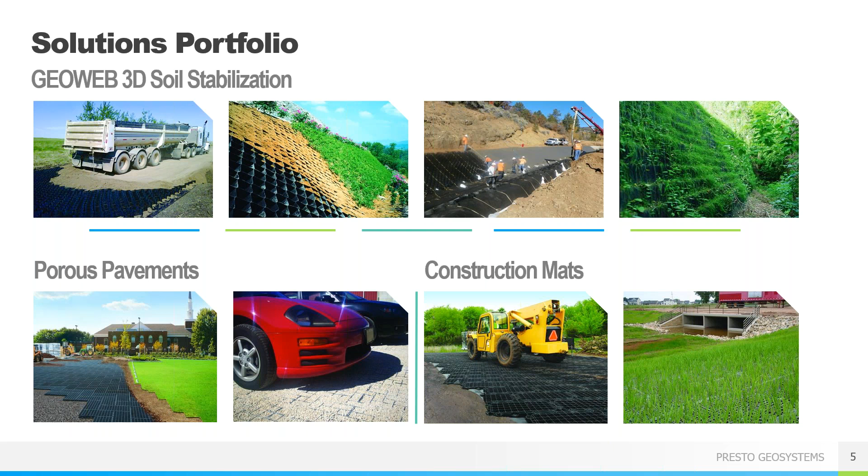As I mentioned, we worked with the Army Corps of Engineers to develop the GeoCell system. The initial iteration used wax paper in order to be water resistant, but that wasn't strong enough. So they made some out of aluminum, which had the strength, but was difficult to ship and install. Finally, a high-density polyethylene, or HDPE, was the chosen material due to its lightweight, flexible nature and the fact that it is inert to nearly all chemicals and climate conditions.

We'll now get into a little general information about our GeoWeb geocells. The GeoWeb system is our version of geocell technology and consists of 2 main attributes. The first is the cell or container size. The cells come in 3 diameters, small, medium, and large openings, with cell heights of 3, 4, 6, 8, and 12 inches available for each diameter. The proper combination of cell size and cell depth depends on the project details.

And with that project evaluation, we can help you determine which one is the most appropriate for your specific application. There are also 5 different section lengths to best fit your needs.

The ultrasonically welded seam, where all of the connecting points are, is very important to the function of a geocell. The stronger the seam strength, the better the performance of the geocell will be. A strong seam allows for heavier infill material, steeper and taller slopes, and better lifetime performance.

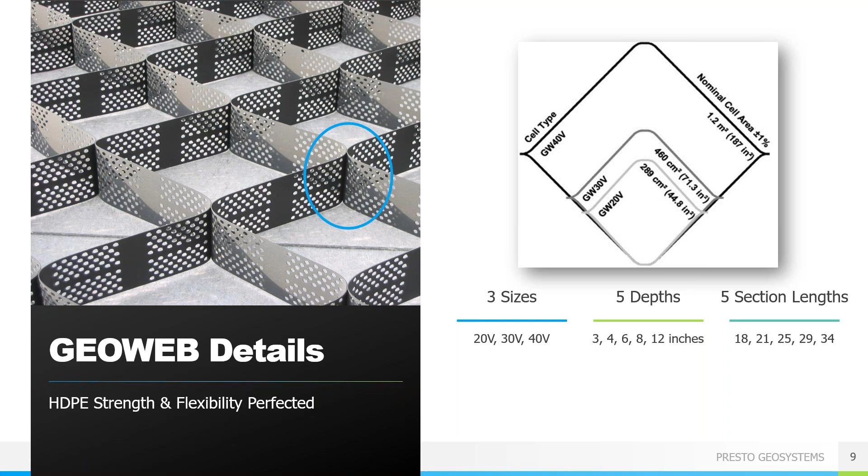To avoid weld failures and the damaging effects of differential settlement, uniformity in performance across all elements of a geocell is much more important than stiffness alone.

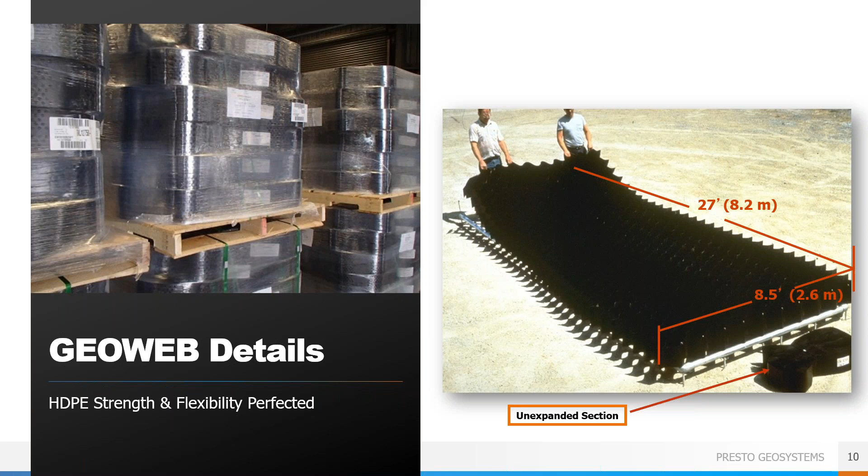Here you can see a typical GeoWeb panel. It comes tri-folded, banded, and palletized. Each section has a nominal width of 8.5 feet with lengths up to 58 feet. The panels are flexible, opening like an accordion, so they can follow the natural contours of the work site without being confined to a rigid set of dimensions. The sections can also easily be cut in the field to fit project dimensions and or go around any obstructions such as trees, manholes, or guardrails.

The second main attribute of the GeoWeb system is the infill, or what you put into the container. An important benefit of the GeoWeb system is that even a low quality aggregate, sand, or certain salvage material can be used to infill the cells. Using salvaged aggregate or sand can save significant amount of money on material and hauling costs.

We can also eliminate fines when desired, since the cells provide the confinement and aid compaction of cohesionless soils. Without fines, you can significantly improve drainage and let the water flow freely through the system, preventing pore pressure buildup and global failure of the cross section.

The ability to use sands and low quality aggregates really sets the three-dimensional GeoWeb system apart from planar geogrids and geotextiles. Those products require high quality materials with very high friction angles to achieve optimal performance. With the GeoWeb system, low friction angle materials are just fine. The GeoWeb panels achieve their full potential even with these poor materials, which can be a huge cost savings.

In order for a geocell system to perform uniformly, it is critical that both the factory welded junctions, or the internal junctions, and field joined junctions that connect individual panels, the mechanical junctions, perform at a level that is commensurate with that of the cell walls. Therefore, an incremental improvement in one characteristic, such as wall stiffness or environmental stress crack resistance, is only valuable if a complementary improvement has been made in the other components of the system.

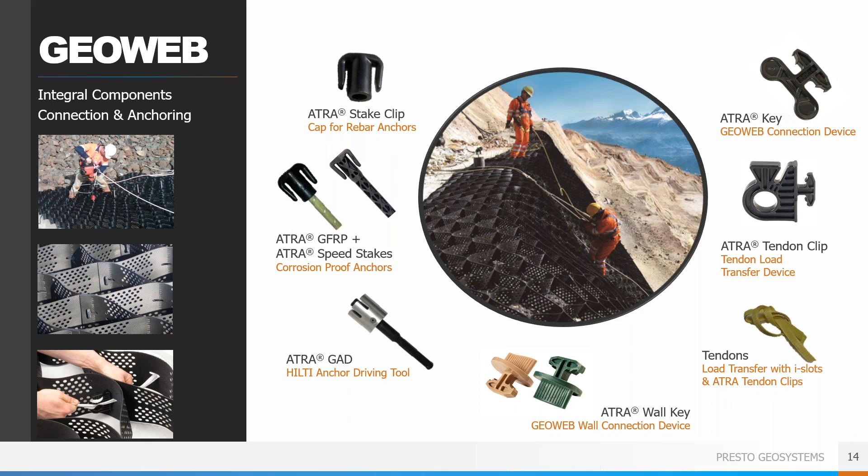Presto's GeoWeb system is equipped with numerous design and construction components that can increase strength and speed of installation. When using stake anchorage, we can provide a simple cap or a standard number 4 or 1/2 inch diameter rebar, or we can also provide fiberglass or plastic anchors when necessary.

The ATRA key is used to connect sections together, both side to side and end to end, creating one fully integrated uniform system, no matter how many sections are connected together. It allows for faster installation of the GeoWeb and will last the lifetime of the project, ensuring that the covered area is protected and that the GeoWeb system will not fail under anticipated stresses.

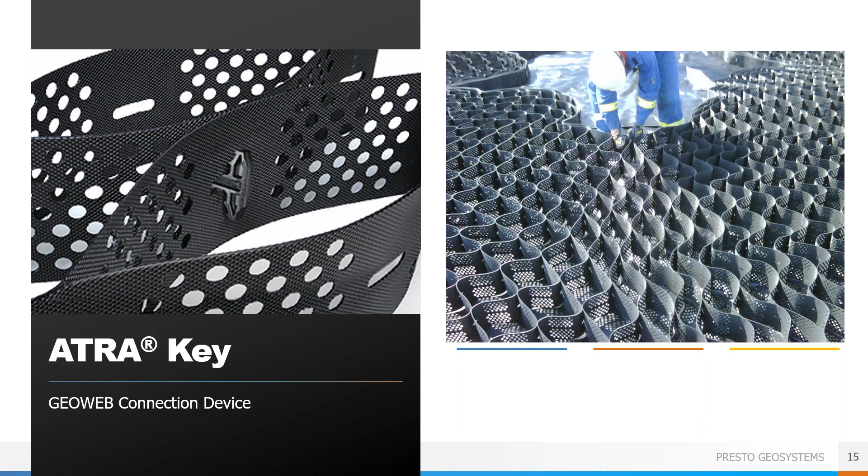The specific engineering values of the ATRA key will ensure the system holds up to loading over time without the corrosion seen in staples or the failure of underperforming cable tie systems, connection methods recommended by our competitors. Our spec sheet calls out the specific engineering values for this patented connector.

For steep slopes where the native soil is highly erodible, or over a surface that cannot be punctured, such as a geomembrane liner, tendons can be used. The ATRA tendon clips transfer the load from heavy infill material to the tendons and crest anchorage system. Only the ATRA tendon clip is specifically designed to fully transfer safely and securely the forces placed upon the geocell.

Every accessory and every feature has been designed and tested to specifically work together so that we go from problem to design to construction solution with a system where the modeling replicates the real world forces.

Now that we have some background on geocells in general, we'll turn toward the energy sector specifically.

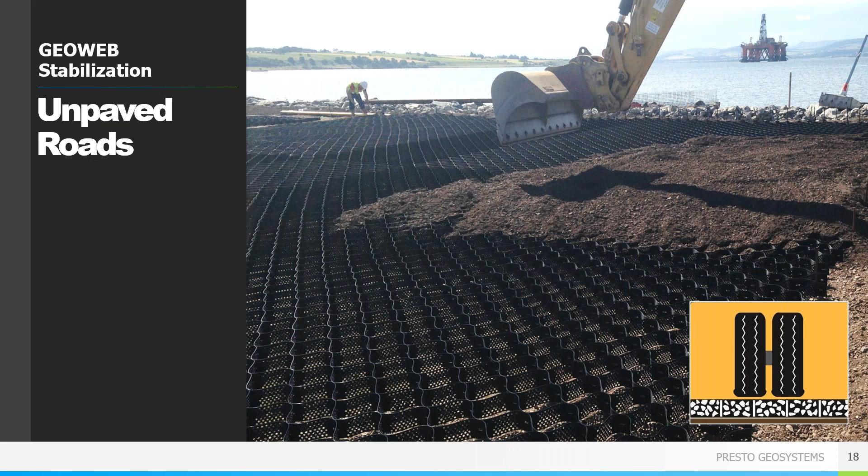The first thing we'll cover is how the GeoWeb system works at the surface to create a stabilized unpaved road. An aggregate surface has advantages in saving pavement costs, and with the GeoWeb system filled with open graded base course, you can design a system that allows stormwater infiltration and provides stormwater storage.

The purpose of cellular confinement is very simple: to stabilize the movement of unstable soils, both horizontally and vertically. The weaker the subgrade conditions, the more practical the insertion of the GeoWeb system is into the design.

There are many great benefits to using GeoWeb. The one I want to highlight is that the system allows for the use of sand, low quality aggregate, or on-site or salvaged material, so you don't have to truck in expensive engineered stone. You can use what is on-site to save on cost and installation time. This is a big benefit over other geosynthetics like GeoGrids, which require specific gradations of high quality stone.

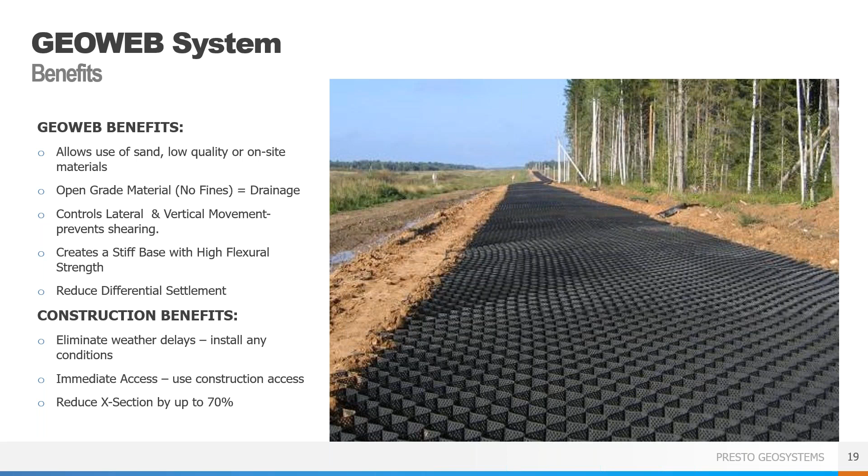By controlling differential settlement, GeoWeb can greatly reduce or even eliminate rutting, helping to control maintenance costs. On the construction end, GeoWeb can be installed in any weather conditions and allows for immediate access, unlike when chemical stabilization is used. It can also reduce your overall cross section by 70% compared to non-reinforced sections.

The GeoWeb system is suitable for use in extremely soft subgrade conditions. In fact, the worse the subgrade is, the more sense GeoWeb will make.

Here you can see the impressive load support benefits of an 80,000 pound loaded dump truck on a partially filled GeoWeb panel over a soft subgrade. You can see how the cells push back against each other to support the load, and that only the adjacent cell needs to be filled for support to occur.

The great benefit to using the GeoWeb system is that you don't need to have every cell completely filled before the road is usable. You can reduce construction time and materials with this approach, a significant benefit of using the GeoWeb system.

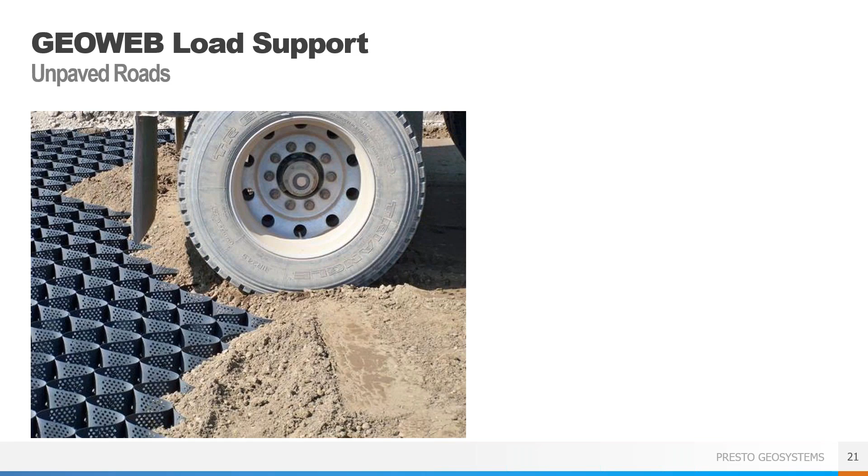The three-dimensional system works in this way. When a vertical load is applied, the active earth pressure in the loaded cell pushes back against the passive earth pressure in the adjacent cells to form a stable system. Each cell helps support the ones around it.

The GeoWeb cell walls also transfer hoop stress, which is important in keeping the system intact and creates a mattress effect. The strength of the seams around each cell, the material properties of the individual strips, and the connection method between panels are all important factors in determining how the GeoCell system can improve load-bearing capacity. Strong seams, semi-ductile resin properties, and integrated connections are critical to a well-performing system.

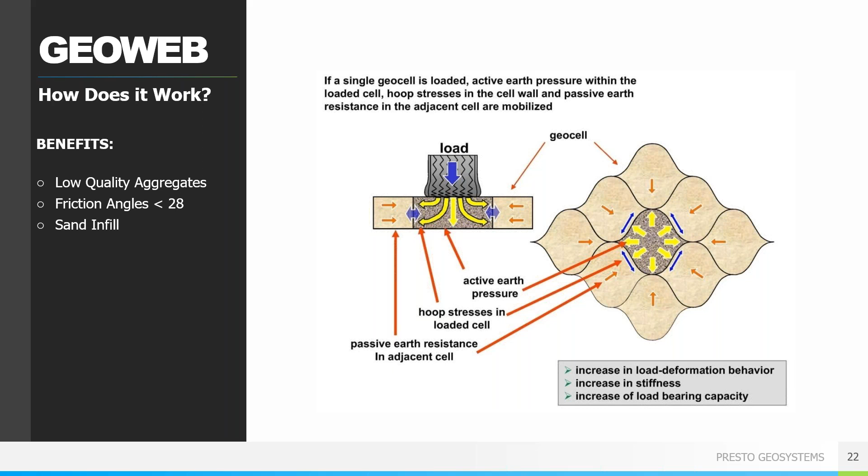The GeoWeb system and accessories are specifically designed to work together to be an effective solution for roads in soft soil locations.

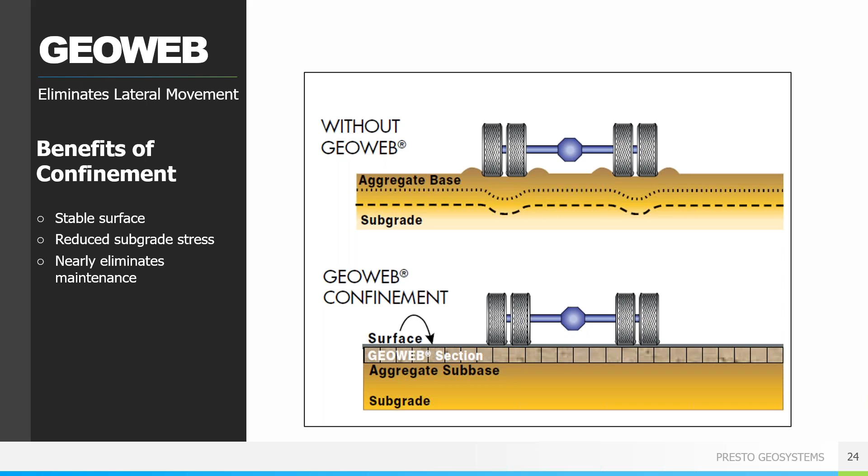By eliminating lateral particle movement, the GeoWeb system can stabilize the surface, eliminating the need for constant maintenance.

So now we're going to look at a couple of project profiles, specifically load support in the energy sector.

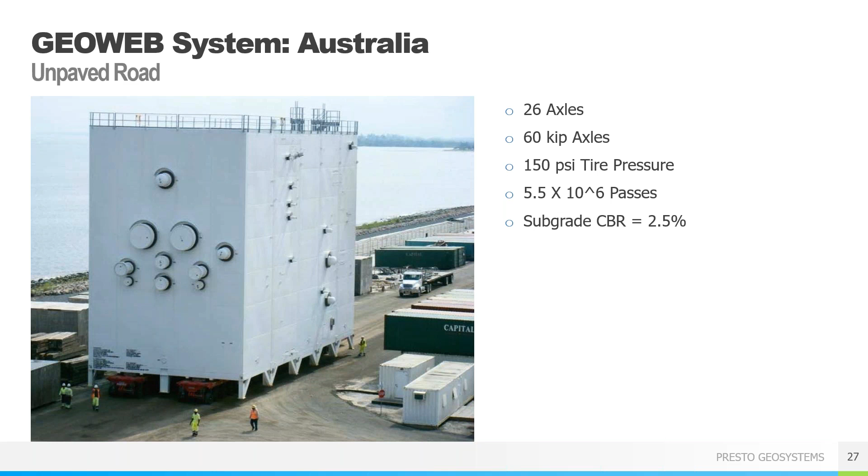This first project was for the Wheatstone liquid natural gas facility in Australia. The equipment was brought in by ship, assembled, and then moved 10 miles inland to the facilities. The vehicle to move the equipment was huge, as you can see here. So the roadway had to be built strong enough to handle the load without rutting or settling. The high number of passes was also a concern, as the heavy loads would cause some serious damage to pavement over time.

We worked with the project engineer to design an aggregate surface roadway that would withstand the vehicle stresses and that could be built quickly in a remote environment. This solution used 2 layers of GeoWeb, which is rare, with the top layer intended to absorb stress and help evenly distribute the loads, and the bottom layer in place to aid in compaction and reduce settlement.

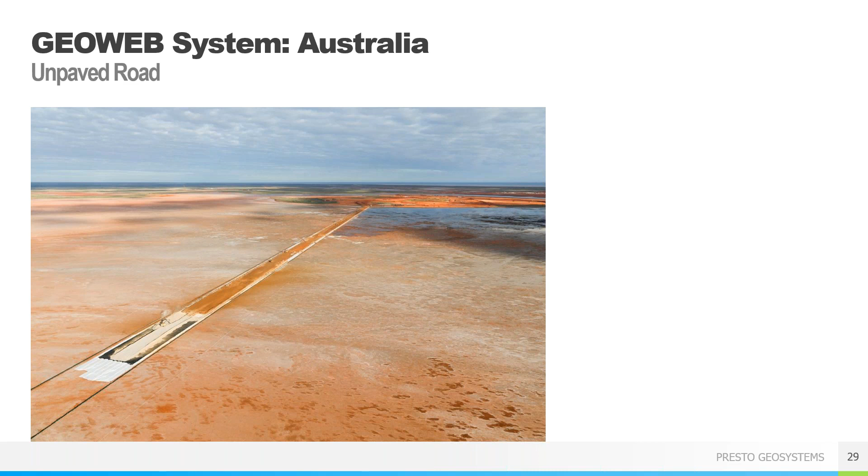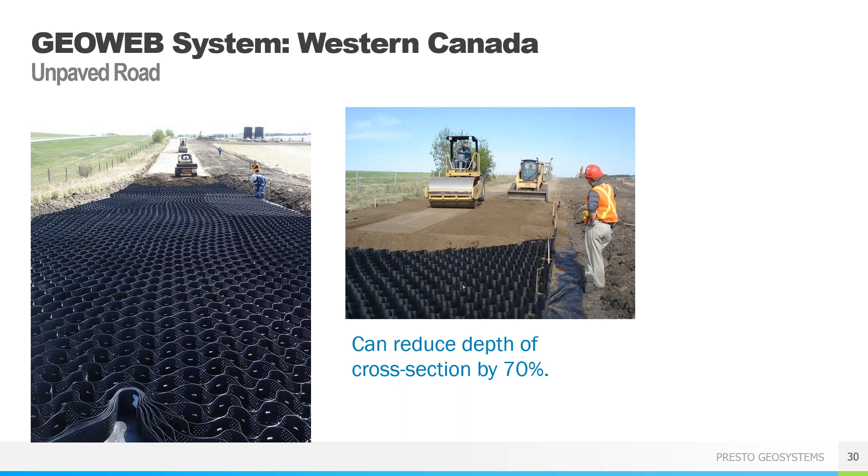Here's a project that allowed for access to oil resources in Western Canada over undeveloped, soft, spongy subgrades. Readily available sand infill was used, so expensive aggregate wasn't necessary to transport in. In most cases, the system can also reduce the depth of the cross-section by 70% or more. Here, we reduced the original section of 40 inches of imported aggregate to just 8 inches with an enhanced woven geotextile, 6-inch GeoWeb filled with on-site sand, and then a 2-inch imported aggregate wearing surface.

This is a Duke Energy project in Florida to install new transmission towers through wetlands. The high winds of Hurricane Michael demolished over 100 towers, all of which had to be restored over this extremely wet subgrade. In this case, an enhanced woven geotextile was placed over the subgrade.

Then the GeoWeb material and sand fill were placed, creating access and maintenance roads, as well as pads around the tower. In all, 2 million square feet of GeoWeb panels were used, with the system acting as both the construction access and the long-term maintenance road.

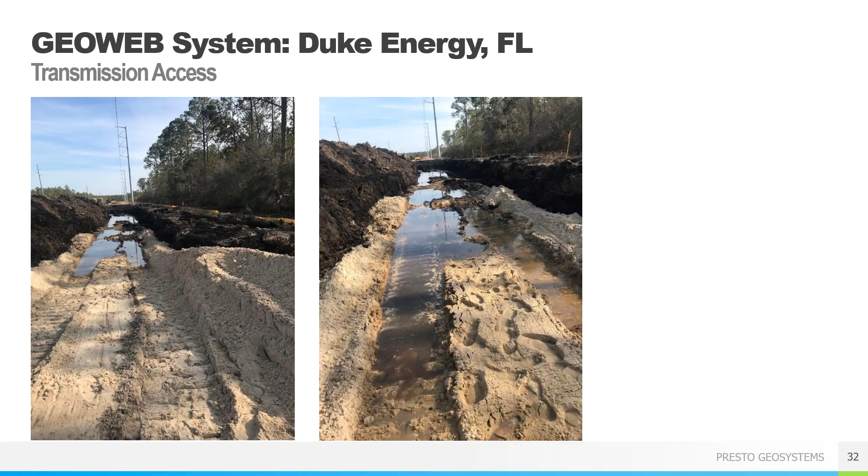The geotextile we used was Mirafi's RS580i with a tensile strength over 5,000 pounds per foot. Not only is it an extremely strong fabric, but it also has wicking capabilities, quickly moving water out of the pavement section. The GeoWeb system works well with pretty much all other geosynthetics to create the best solution for a given project site, depending on loading requirements, drainage issues, or any other concerns you may have.

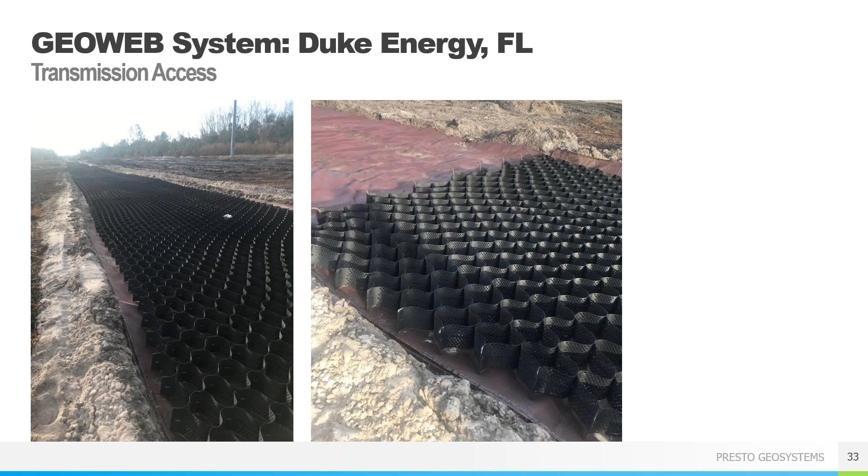And here we are at mid-installation. You can see the empty GeoWeb panels in the background of the photo. During construction, again, the contractor can use the GeoWeb road as soon as it is filled in. Pretty useful when you're trying to minimize the impact of construction on the surrounding environment.

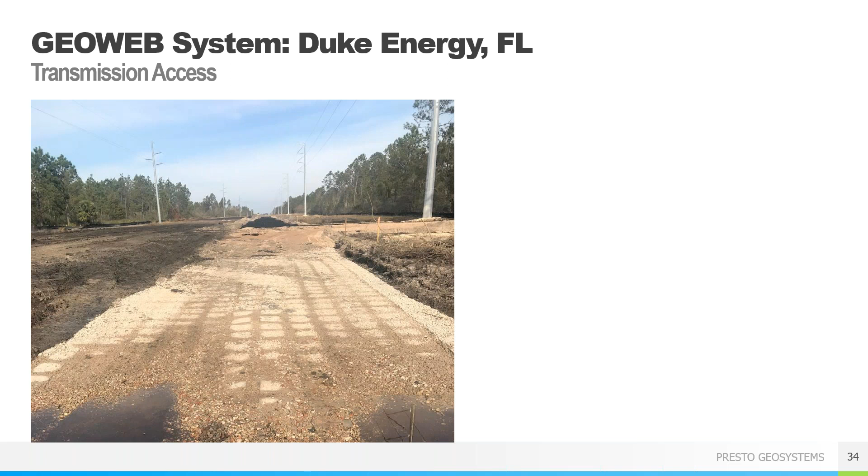Here we have another energy project in Florida, again through very wet, soft soils. In some locations, there were actual low water crossings where water would be slowly flowing over the top of the road. This was not a problem when using the GeoWeb system. Given the site hydraulic conditions, we can even recommend the required stone size to prevent long-term washout, which we'll discuss more a little bit later.

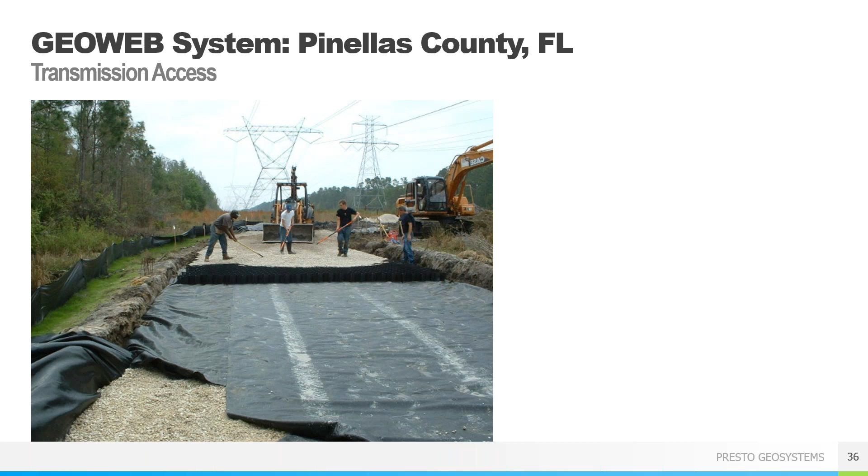Because it was important to not interrupt the potential water flow through this wetland area, a high-quality open-graded aggregate was used. The GeoWeb panels themselves don't impede water flow since they are so open, so there's minimal disturbance to the environment, which is sometimes required by local regulations.

This substation access road in Louisiana was originally designed with GeoGrid reinforcement, but due to low CBR values, it was switched to GeoWeb with sand infill.

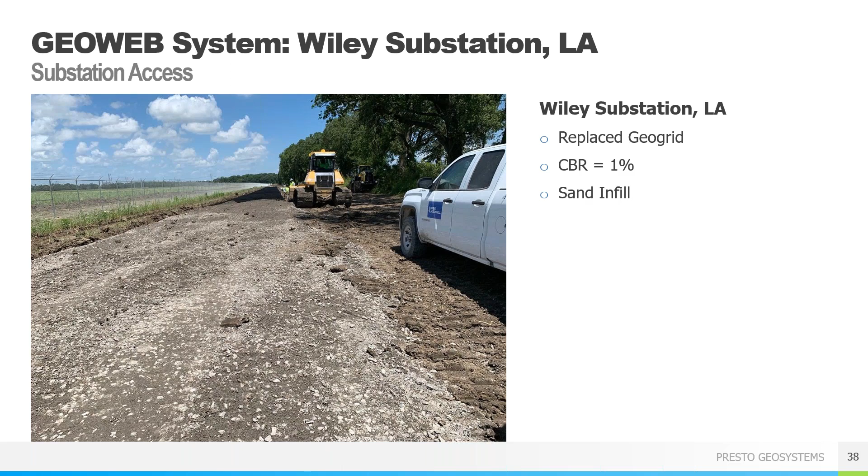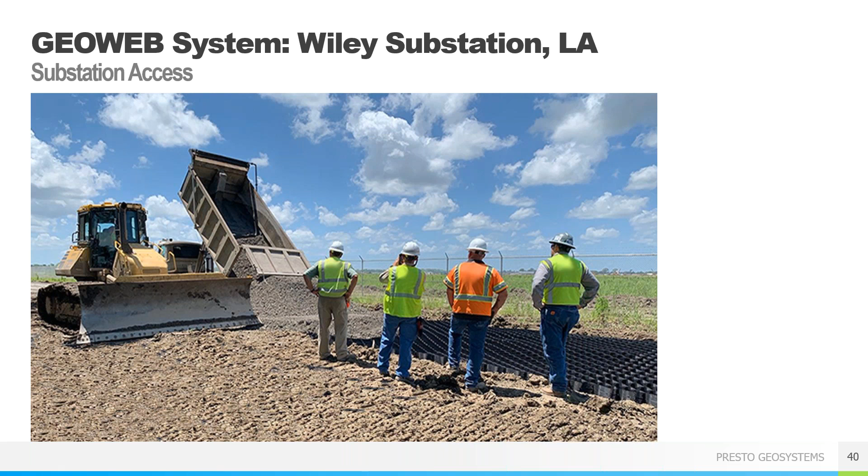Again, we get an idea of the construction process. You can dump the infill material in piles directly on top of the GeoWeb panels, then use a dozer or rake to push the material into the open cells to fill them. And again, here we see the completed access road.

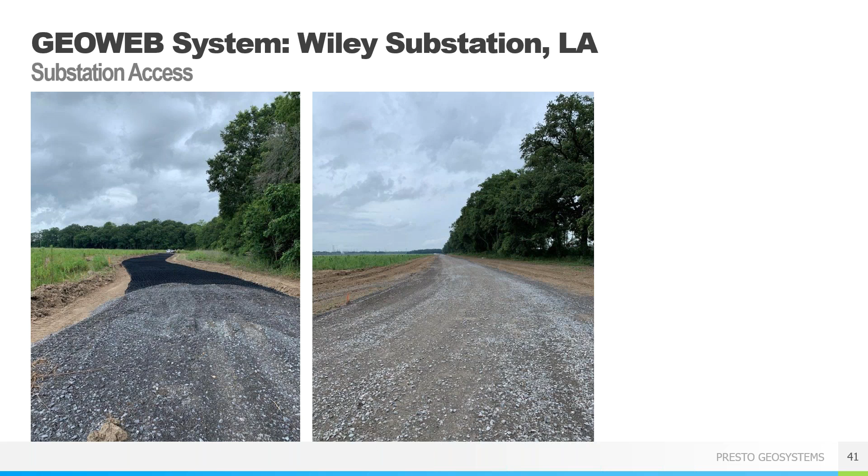Next, we have a wind energy project in Germany using a combination of sand and aggregate infill from on-site sources. Large equipment was used to move the wind turbines, so this road had to be very durable. Typical turbine will require 50 concrete trucks, steel reinforcement, the tower, the blades, and the turbine accessing the site over the course of a few months.

Axle loads are usually around 20,000 pounds. To handle these loads, 12 inches of sand was confined within the GeoWeb panels, which helped distribute the load and significantly reduce the vehicle stress seen by the native subgrade. Again, note the geotextile that was placed below the GeoWeb panels for separation.

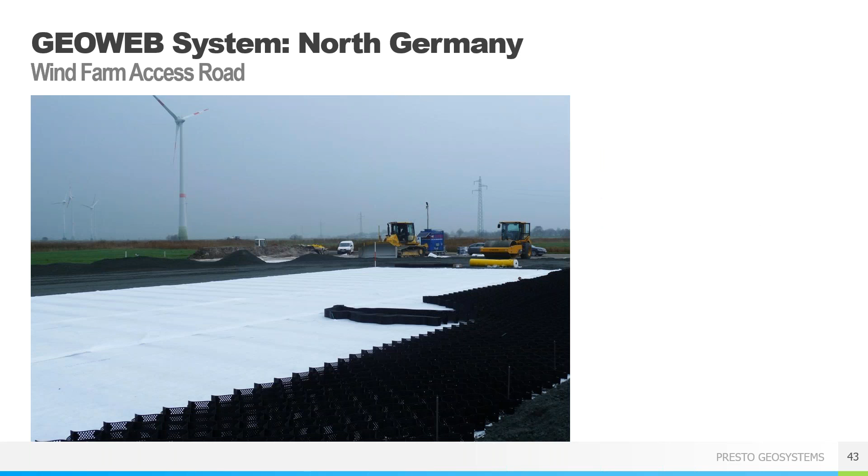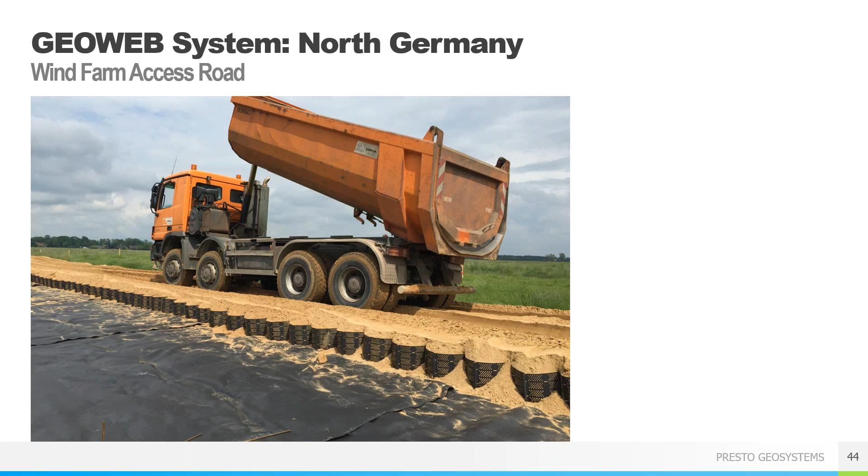A solar farm in Brandywine, Maryland was developed at an abandoned quarry site, leading to some areas with poor soil conditions.

Vanguard Energy required a site access solution to allow safe, long-term access for maintenance and emergency vehicle access. While traffic is infrequent, the roadway needed to support up to 70,000-pound fire trucks. For stormwater management reasons, they required a permeable roadway.

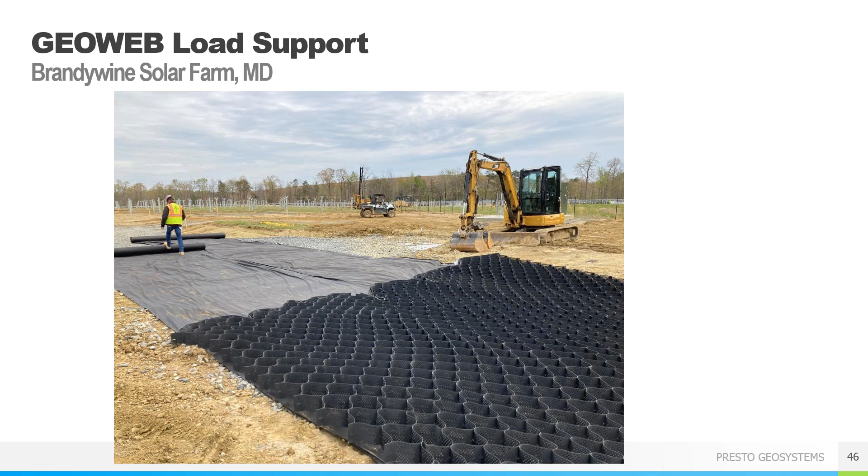Vanguard reached out to Presto Geosystems for a solution that could support the required loads while maintaining permeability. We recommended our GW30V6, which is the mid-size cell, 6 inches deep, over a non-woven geotextile.

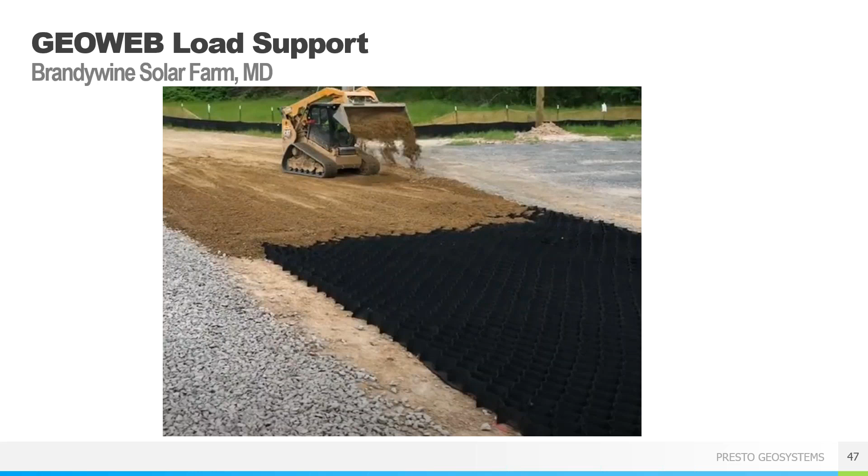In all, 39,000 square feet was installed and infilled with a mixture of on-site material, imported stone, and topsoil in order to build a vegetated roadway capable of supporting heavy vehicle loads. This mixture, which we refer to as an engineered fill, was used to support long-term vegetation while still providing load support stability. If vegetation is not required or desired, a clean sand or clean crushed aggregate can be used as infill and still provide a permeable surface.

One of the biggest questions we get is about cost, which of course is no surprise, especially if this is a new technology for you or your area.

Next, we'll briefly discuss the benefits of using GeoWeb at electrical substations.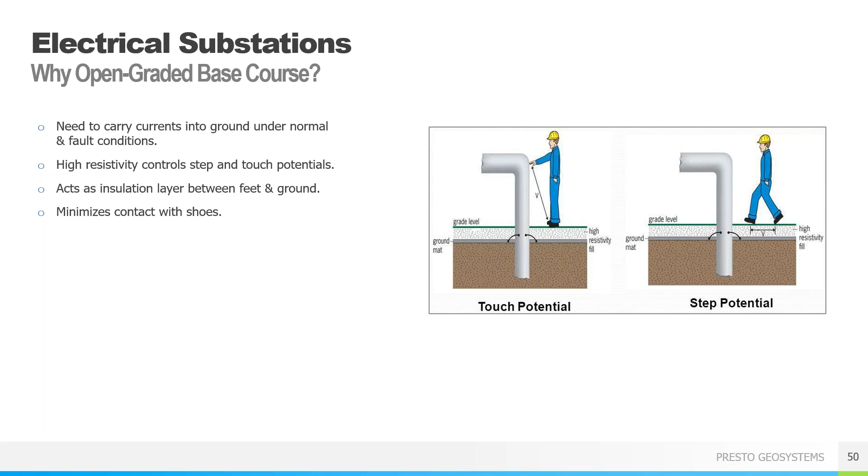GeoWeb works quite well in electrical substations, locations which have some pretty specific requirements and needs to help protect workers. Using an open graded base course is essential and easy to do with the GeoWeb system. Compared with an unreinforced system, there's very little maintenance required over time. The GeoWeb system allows for water drainage and doesn't need to be heavily compacted, so it is quick to install.

For this project in Tampa, Florida, GeoWeb was used both as the access road to the site and the working platform around the transformers. The GeoWeb allows for good water infiltration, so there's no ponding at the surface, which is a big safety hazard on electrical sites.

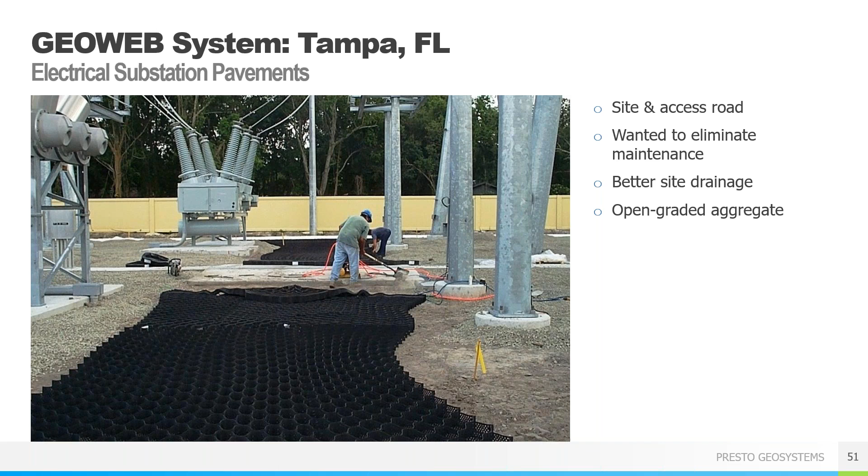As many energy projects need to deal with stormwater and potentially steep slopes, we'll now go over both channel and slope protection, starting with channels.

GeoWeb can be placed along the embankments of stormwater channels and ponds to help prevent erosion due to fluctuating water levels. Low flow situations are easily handled by vegetated GeoWeb systems, creating a natural looking embankment without intensive maintenance requirements.

The GeoWeb does not need to cover the bottom of the channel if continuous low flow water is present, and the type of vegetation within the panels is not important to the function of the system, so choosing plants that are native to the area and are okay with the occasional soaking will be a big help in reducing potential maintenance.

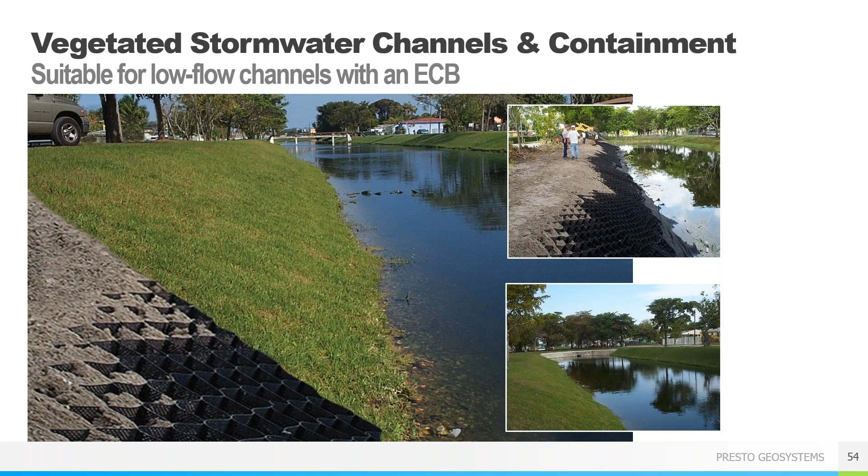The vegetated GeoWeb system has a lower cost than a riprap-lined channel since you can use local topsoil and don't need to import large stones.

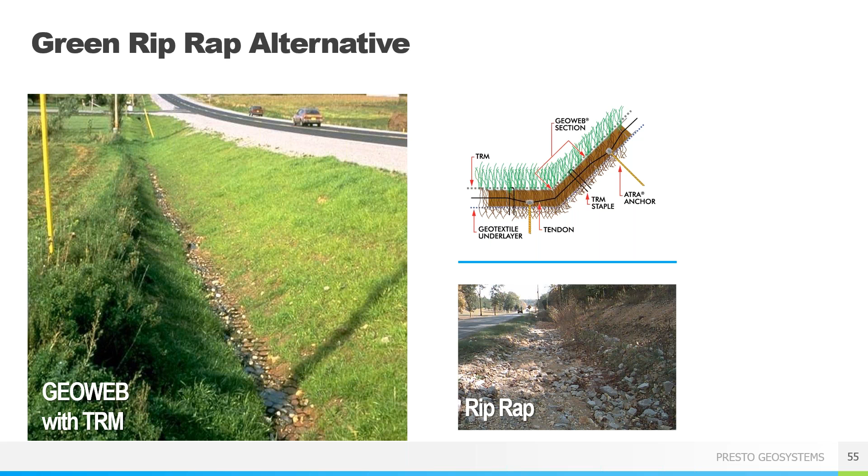There's less maintenance as well, since riprap channels need constant inspection to replace lost stone and remove weeds. With a vegetated channel, the only maintenance is the occasional mowing, which can be done with your standard lawnmower with no special equipment required. And finally, vegetated channels have better aesthetics than riprap channels.

It may not seem that way, but vegetated channels are actually a good solution for higher flows when stabilized with the GeoCell technology and a turf reinforcement mat overlay.

The improvement is incredibly high, with our system able to withstand 29 feet per second and 16 pounds of shear, compared to just 5 to 6 feet per second with an erosion blanket only. This allows lower impact vegetated channels to be used instead of expensive, high-maintenance riprap, concrete, or articulated concrete blocks.

One of the best things about the GeoWeb system is how much trust we have in the system working, and that is because we have the experience and research to back up what we are saying. Significant testing was done at Colorado State University in Fort Collins, which is considered one of the top hydraulic research facilities in the world. The facility is unique in that it is located under the Horsetooth Reservoir and has a couple hundred feet of static head and can achieve extremely high velocities and shear stresses in both their indoor and outdoor flumes.

Vegetated infill testing was performed with two objectives in mind. The first was the ability to withstand high velocities and shear stresses, the main components you think about in hydraulic situations. The second objective was to compare the performance of topsoil-filled GeoWeb with riprap and other conventional solutions, such as erosion control blankets and turf reinforcement mats.

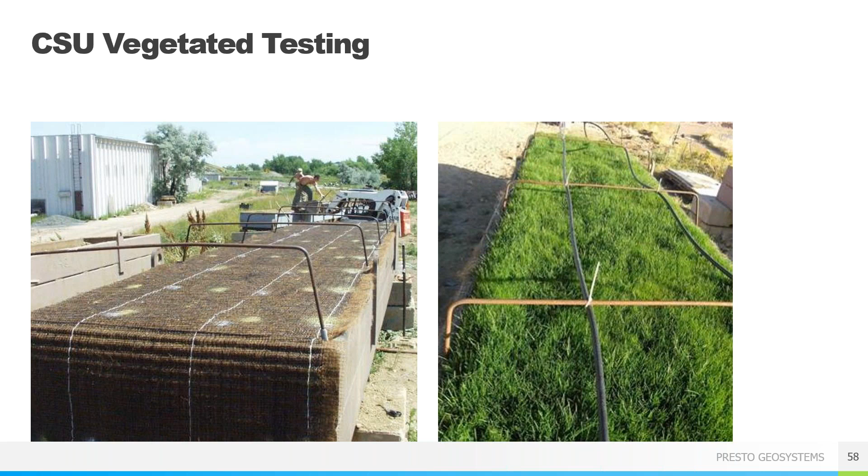The test consisted of 6-inch deep panels filled with topsoil and surface protection, which is probably our most recommended cross-section for this type of project. Vegetation was established and grown to 6 inches to replicate field conditions. A total of 10 one-hour tests were performed in the outdoor flume with varying conditions, including flow rate and bed slope angle.

The testing was done in accordance with ASTM D6460 standards, which covers both soil loss through scour and blade density. The ASTM standard considers a successful test when you have less than half an inch of topsoil loss and at least 300 blades of grass per square foot. The blade density is important as vegetation growth is a key factor in overall long-term stability.

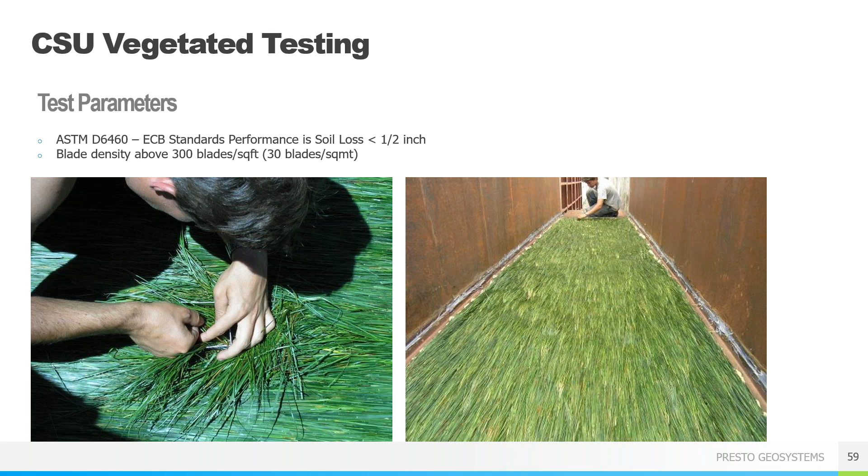Here's a quick comparison to show the impressive results. You can see that GeoWeb filled with topsoil can handle a velocity over 29 feet per second compared to 12-inch riprap, which comes in around 14 feet per second.

You can also see that the GeoWeb and surface protection far outperforms a high-performance TRM alone and doubles the acceptable velocity and shear stress. The key takeaway is topsoil-filled GeoWeb provides 2 times the protection of 12-inch riprap and also doubles the performance of a standard TRM or erosion control blanket in vegetated condition.

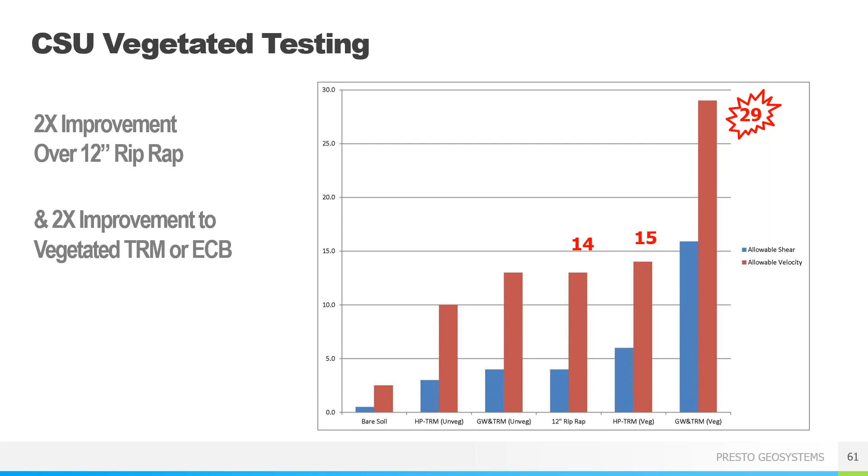This solution is suitable for any situation where you have very high velocities but short duration flows. It allows you to maintain vegetation in areas that would previously have been concrete or very large riprap.

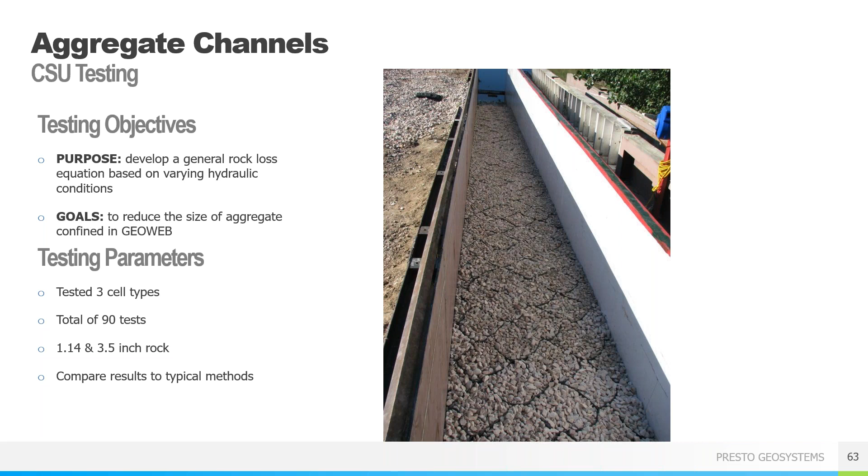We also tested aggregate channels, and for these tests, we used 3 different cell sizes and 2 different rock sizes and ran a total of 90 tests. All of these data points allowed for a regression analysis to be performed, and through that analysis, we came up with an equation which allows us to perform calculations.

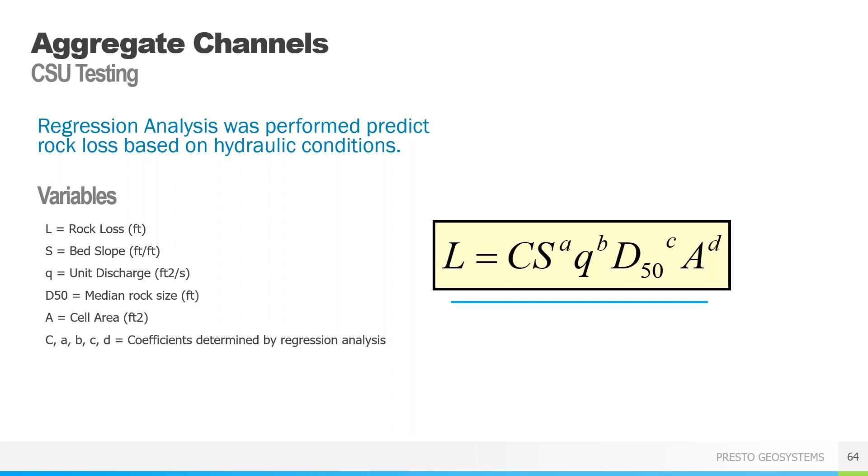So now, given the bed slope and unit discharge of a particular channel, we can manipulate the rock size and cell size until our rock loss L is 0.

When compared to traditional riprap sizing tools by Abt-Johnson and the Corps of Engineers, GeoWeb channels can reduce your rock size anywhere from 2 to 10 times, offering significant cost savings in not only rock costs, but also transportation and installation. The large variance in size reduction is due to bed slope. The flatter the bed slope, the greater we can reduce your rock sizes.

And finally, concrete filled channels. This particular project is a water conveyance channel in Colorado. It used a geomembrane, then a geotextile, then our mid-size cell 3 inches deep with 3,000 PSI concrete. Tendons were used for anchorage as we couldn't puncture the geomembrane.

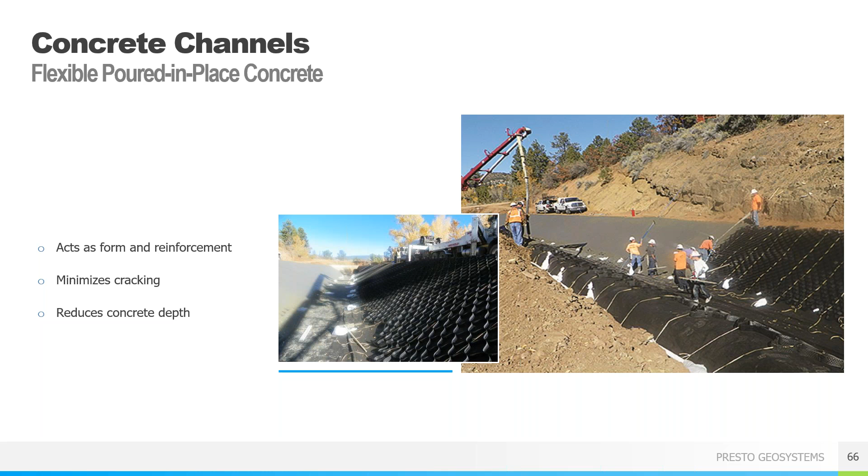Studies done by the U.S. Bureau of Reclamation show that concrete-filled GeoWeb is the most cost-effective, lowest maintenance solution for their water conveyance channels.

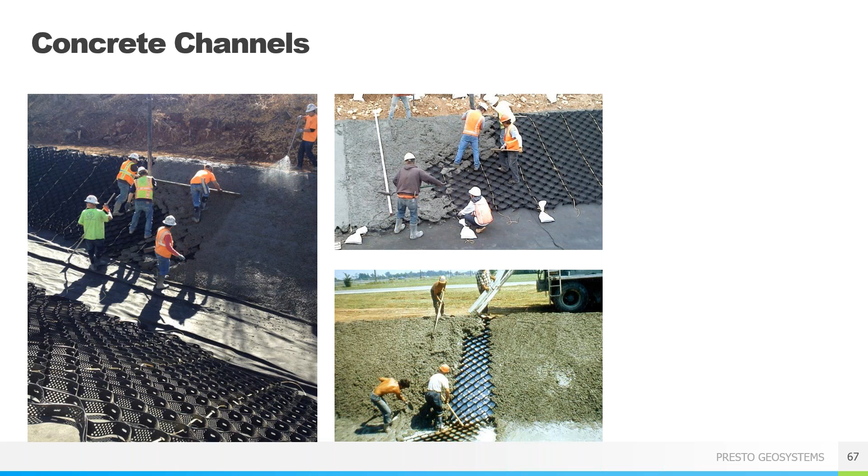Once GeoWeb is installed, it acts exactly like a concrete form. Here, the concrete is pumped into the cells. It can also be poured directly in from concrete trucks if access allows for it. You then screed and finish right to the top of the cell walls.

In the picture on the right, notice the flexibility of the system. It won't crack like poured in place concrete will.

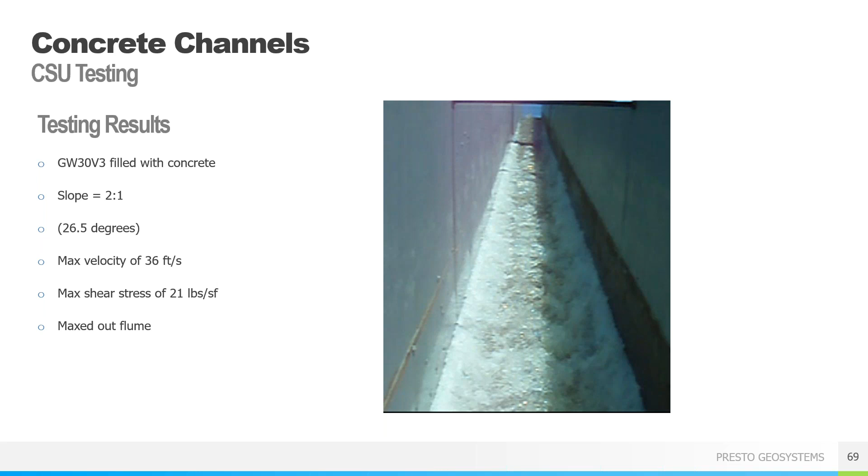Again, we have very impressive results for the concrete filled version of the system. The 3-inch depth was able to withstand 36 feet per second and 21 pounds of shear. We actually did not even fail the system, but rather maxed out the flume at those conditions.

So generally speaking, GeoWeb is going to improve the hydraulic performance of whatever infill material you use. With vegetation, we promote infiltration and reduce runoff. With aggregate, we can allow for smaller, less expensive rock. And then with concrete infill, we don't need any other forms, and it will flex with subgrade deformation, minimizing cracking.

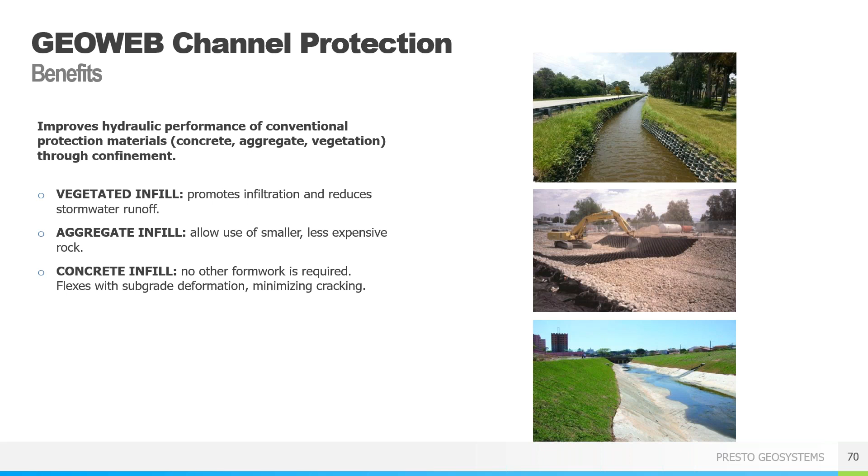Next, we'll go on to talk about slope protection.

The GeoWeb works in multiple ways to protect slope surfaces. It prevents significant movement of the soil by confining it in individual cells. By separating soil into smaller segments, the system resists mobilization of the entire slope face due to hydraulic loads and prevents long-term erosion. It's important to emphasize that proper installation of the GeoWeb includes embedding it into the crest of the slope, which will prevent water from flowing beneath the system and undermining it. No rills or gullies will form beneath the GeoWeb and lead to failure.

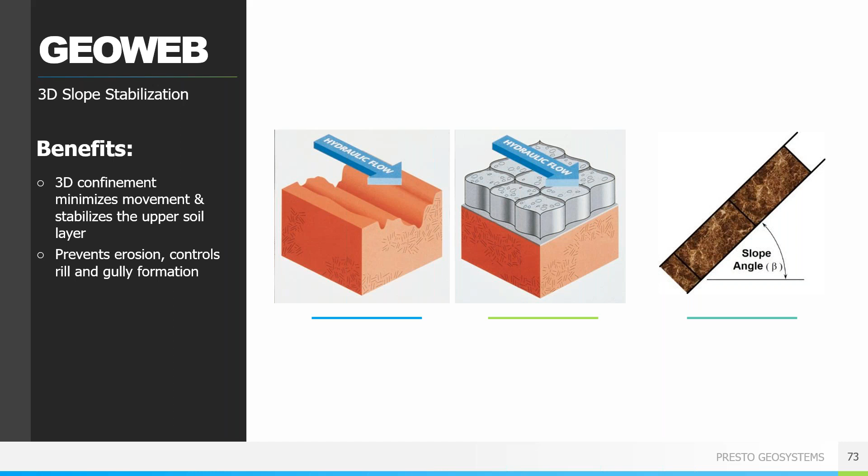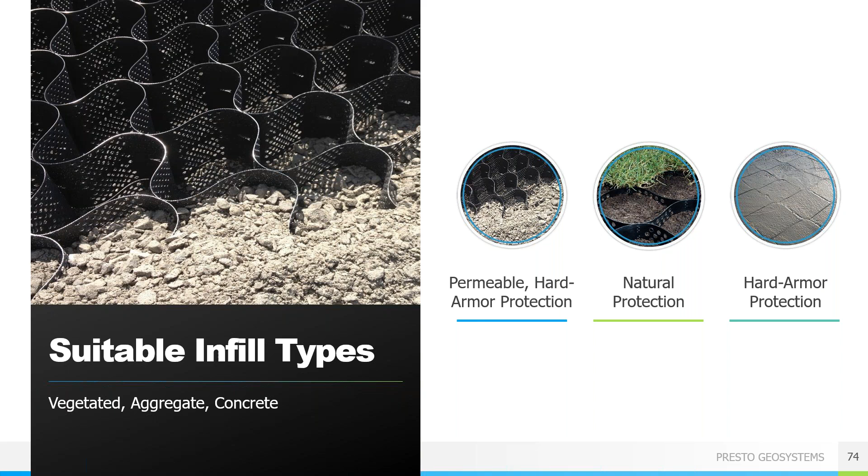GeoWeb on slopes can be filled with several different materials depending on your project needs. Topsoil, aggregate, or concrete are all options. There's a lot of different options for the cross section on the slope depending on project details and needs. Different types of anchoring are available, as I briefly mentioned at the beginning. Our engineering evaluations can help determine the best system for your project needs, so that you know you're getting something that works and not a one-size-fits-all solution.

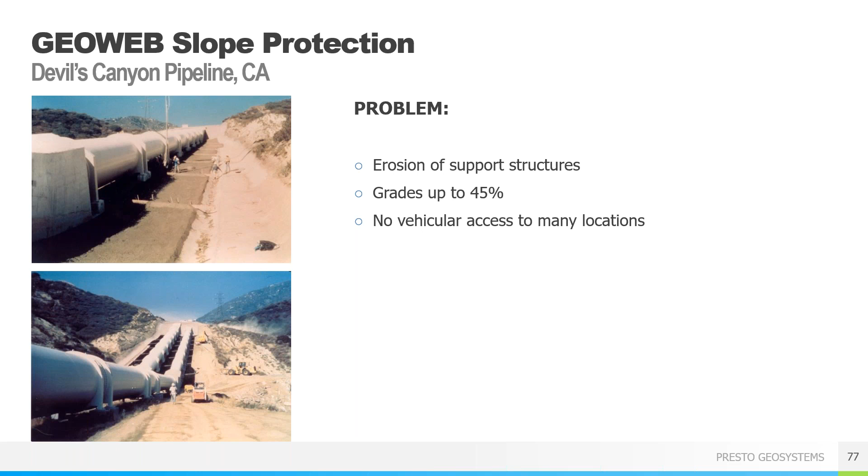Now we'll talk about a few project profiles in the energy sector. Here's Devil's Canyon Pipeline in California. The sandy soil around the support structures for this pipeline was experiencing significant erosion due to wind and water flow. There was no vehicle access to many parts of the pipeline because the sandy soil couldn't support vehicular loads. To both protect the support structures and allow pipeline maintenance access, the GeoWeb system filled with concrete was used. The system was fast and easy to install, even in this remote location.

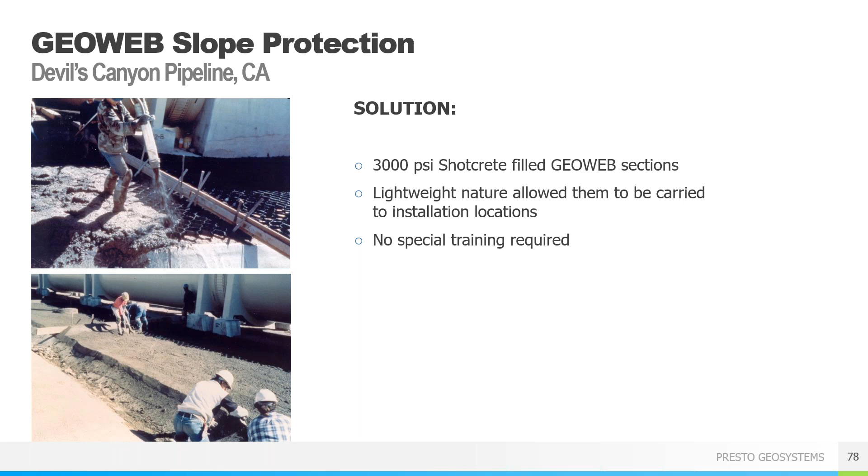Here's a project to replace a deteriorating asphalt cover on the berms at a liquid natural gas facility. They needed to reface the primary and secondary dikes without disturbing them, so that the facility did not have to shut down during construction.

We used different anchorage methods because of the height difference between the primary and secondary containment areas. On primary containment, we used a 6-inch deep cell with tendon anchorage, and on the shorter secondary containment slopes, a 4-inch depth with our plastic ATRA speed stakes.

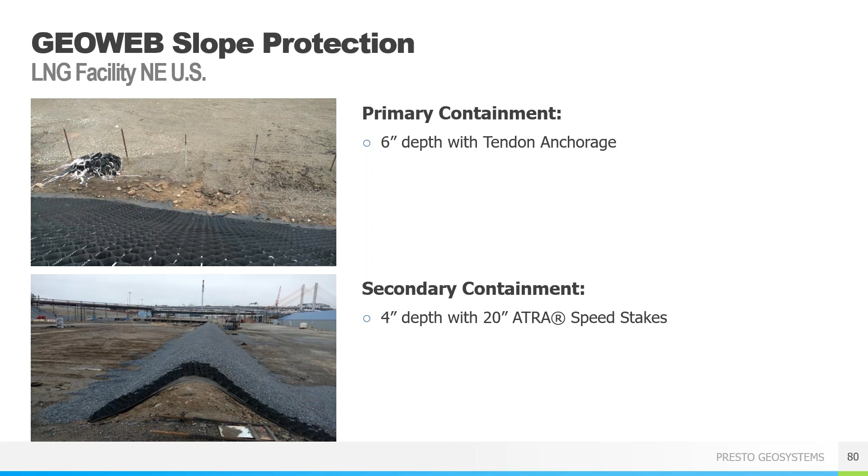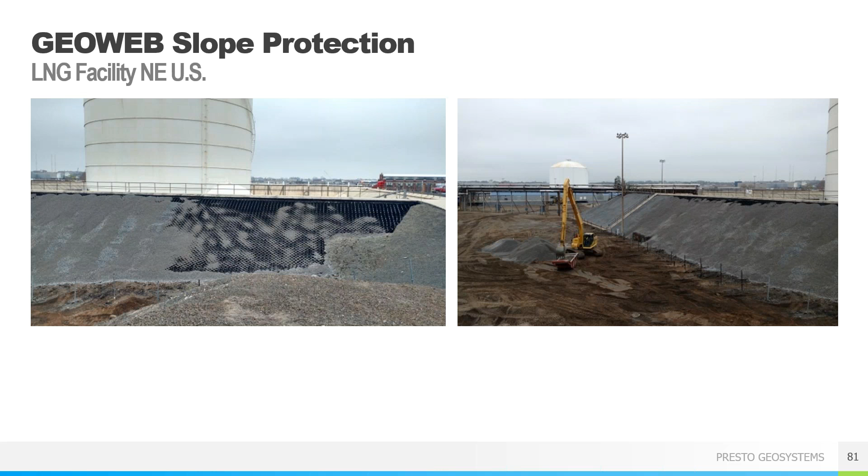And here we have the installation. You can see the GeoWeb installed on the primary slopes, partially filled on the left-hand photo and nearly completely filled on the right-hand photo. Then here we have the completed secondary dike in the foreground with the primary dike in the background.

Spotsylvania Solar Farm is the largest solar farm east of the Rockies at 3,500 acres, and it has hundreds of detention ponds to handle stormwater runoff. A 2-to-1 slope into one of the ponds at the back of the site was causing the owner particular problems, as it had to be repaired several times using stone check dams, erosion control blankets, and turf reinforcement mats, with nothing working due to the large volume of water, the slope of the drainage area, and the fact that there is a road right at the top of the damaged slope, leading to high volumes and velocities.

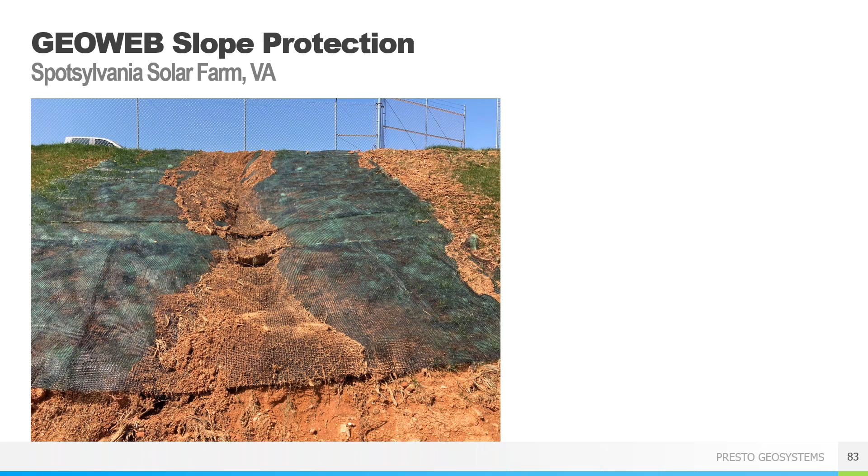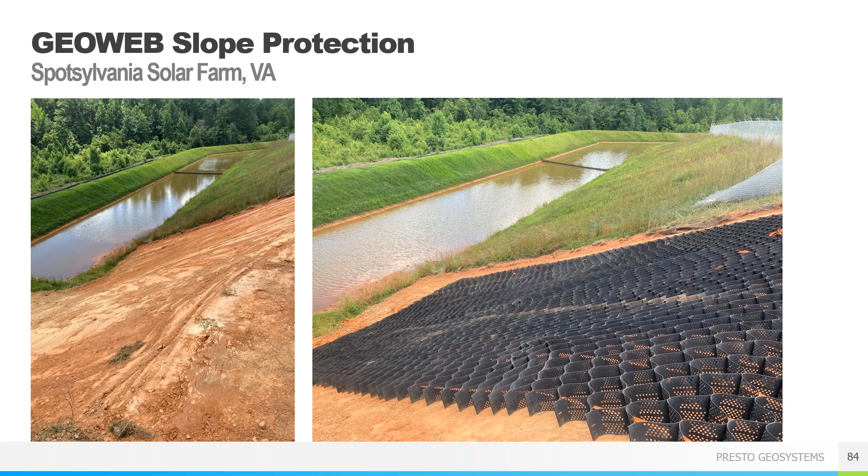Eventually, the GeoWeb slope protection system was chosen as a solution. The slope was smoothed out and the GeoWeb panels placed over the prepared slopes using the tendon anchorage system. The tendons were tied to a dead man pipe that was buried in a trench at the crest. Then the trench and GeoWeb panels were filled with locally available topsoil. The slope was then hydroseeded and covered with a straw coconut blanket.

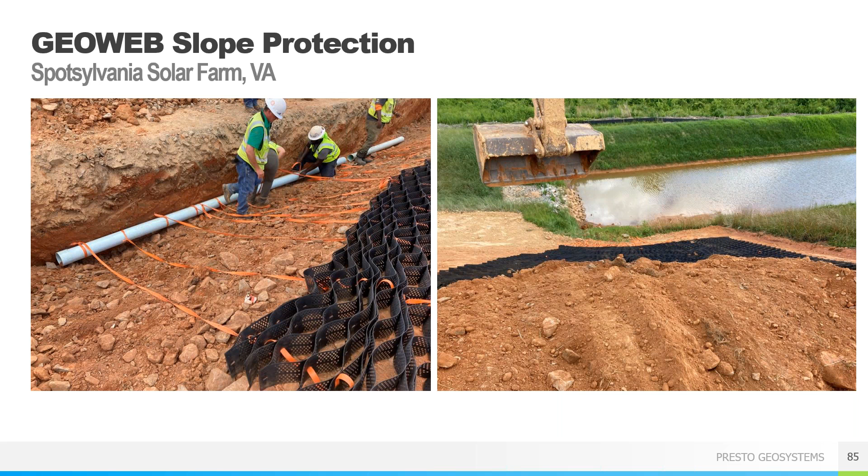Our recommendation was to use our mid-sized cell, 6 inches deep, and anchor with 3 polypropylene tendons and an ATRA tendon clip every 6 cells downslope.

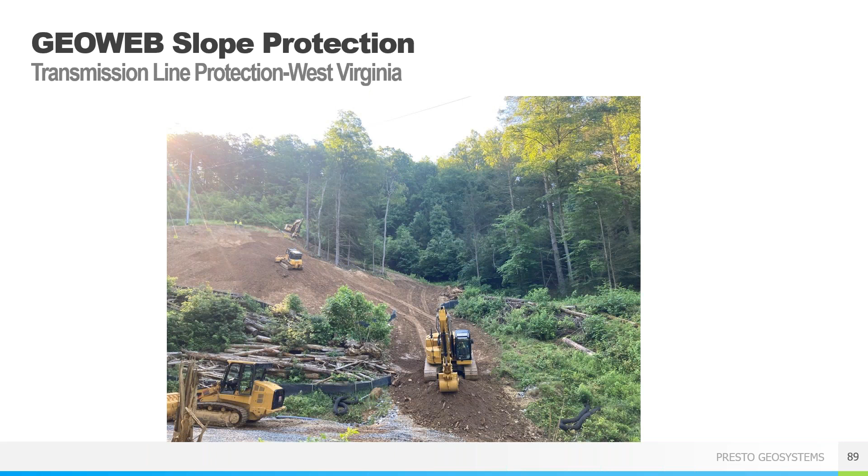The panels were pre-assembled off slope for ease of construction, and the slope was graded as smooth as possible. The pre-assembled panels were then pulled down the slope, which I'm going to show here. With pre-assembly, the only on-slope work is connecting adjoining sections side to side. This can greatly speed up the installation process and make for a much safer install, as workers aren't constantly on these 1.2-to-1 slopes on a regular basis.

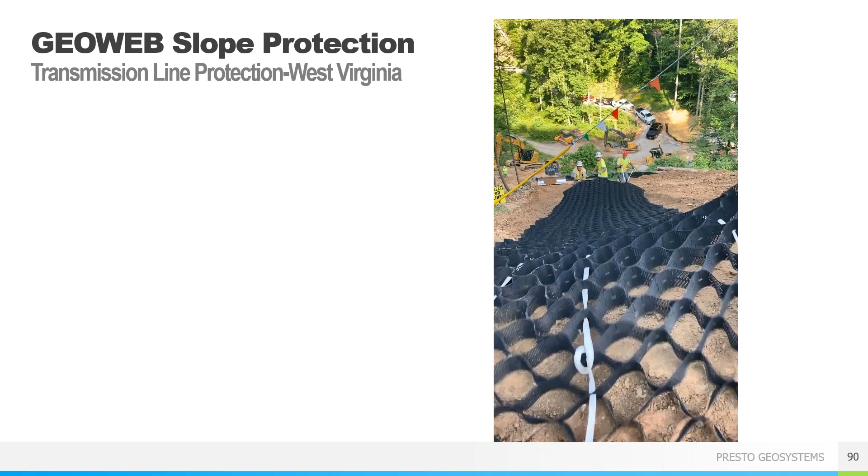We'll finish with a brief discussion of our reusable lightweight GeoTerra construction mats. When you need access quickly for a temporary solution, our construction mats are the way to go. They are intended to be placed directly on top of existing grade, generally with a geotextile separation layer placed first, and don't need any infill material.

The mats can support both tracked and wheeled equipment and vehicles. Testing from the University of Kansas shows that they are structurally equivalent to 12 inches of aggregate, offering significant savings in both placement and removal, as well as reducing the overall carbon footprint of the project.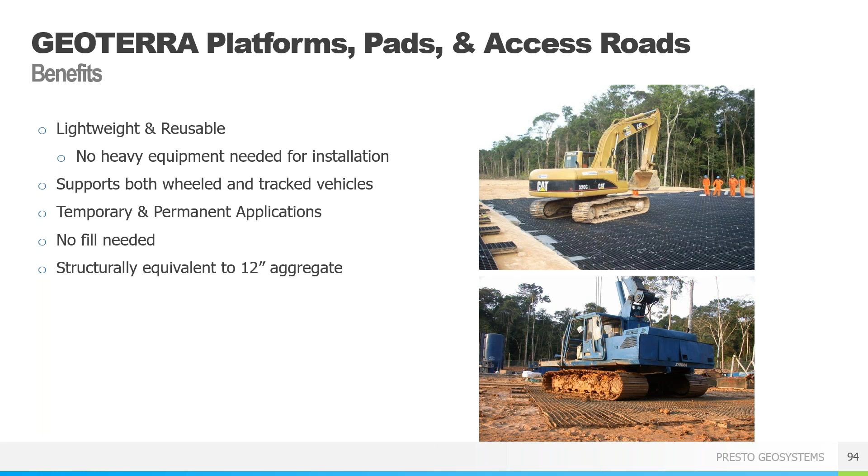With both versions of the GeoTerra, the Classic and the GeoTerra GTO, we recommend different laying patterns based on direction of traffic. Generally speaking, we want to create a layout that avoids long continuous seams. This is true of both the bricklayer and herringbone patterns, with the bricklayer suitable for unidirectional traffic and the herringbone for multi-directional. The side-by-side pattern can be considered for relatively lightweight and/or very short-term installations.

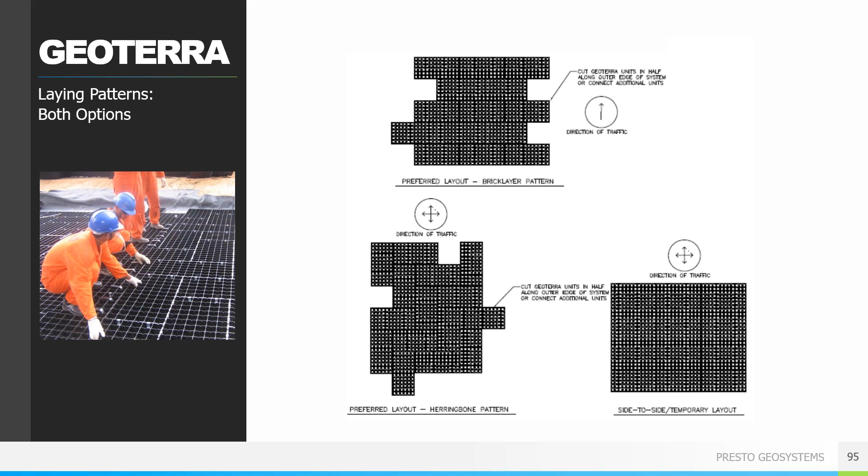So now we'll look at each one of the products a little more closely, starting with the GeoTerra GTO, which uses a plastic bolt connection method, making installation relatively fast.

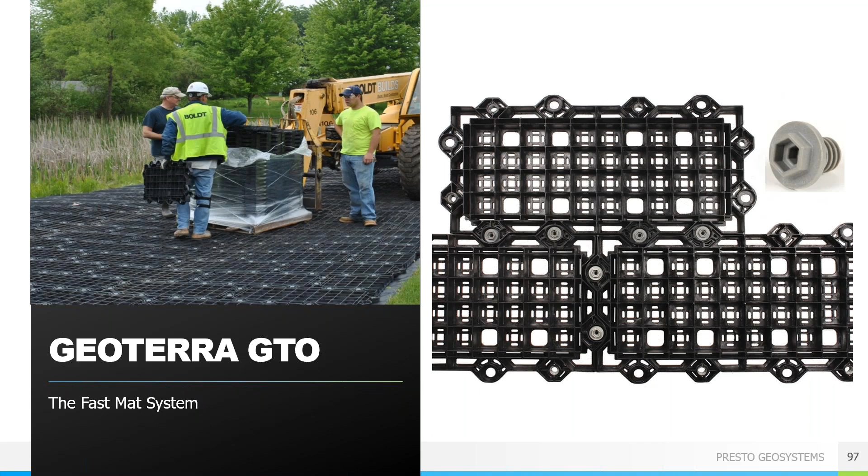Here are some of the specs on the product. It's about 4.33 square feet when first delivered to site. But once you do the first assembly of both of these systems, they can be left in much larger mats. Notice we have a crush strength of 550 PSI and a bottom open area of about 20%.

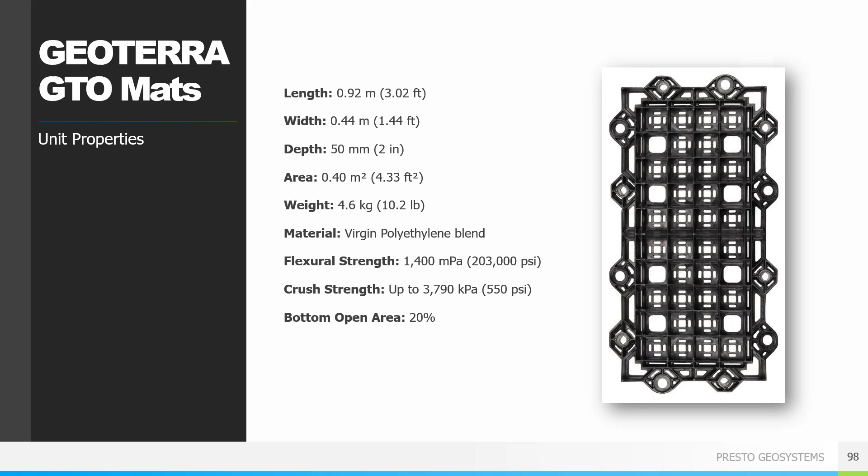Again, the units are locked together with bolts to form a network of interconnected structural mats. With this system, you can install about 150 square feet per man-hour using a cordless drill.

Next, we have the GeoTerra, which is one of the lowest cost, if not the lowest cost, structural mats on the market today. The units are slightly larger than the GTO units at nearly 5 square feet each and weigh just 9 pounds, while the crush strength is less than the 550 PSI of the GTO, it's still 420 PSI, which is nearly 4 times the loads applied in HS-25 loading.

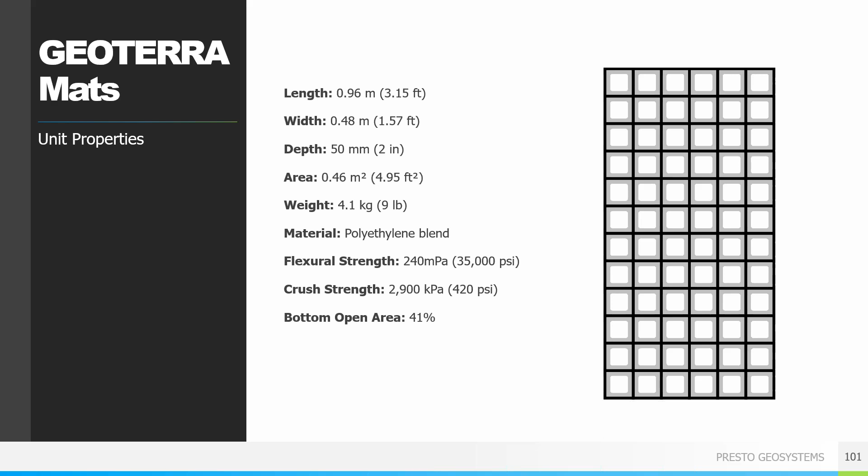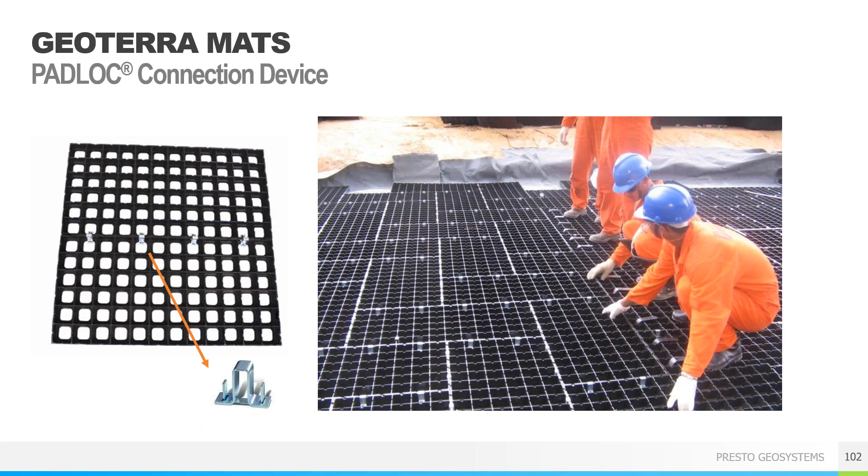Again, testing at the University of Kansas showed that both GeoTerra and GTO are structurally equivalent to 12 inches of aggregate. With the GeoTerra, the units are locked together with a 2-piece PADLOC connection device to form a network of interconnected structural mats. The PADLOC allows for pre-assembling larger mats either on or off-site to provide efficient transportation and installation. With the GeoTerra, our installation rate is about 100 square feet per man-hour.

These mats are then easily transported in much larger mats on trucks or even by helicopter. And again, the units only weigh about 2 pounds per square foot.

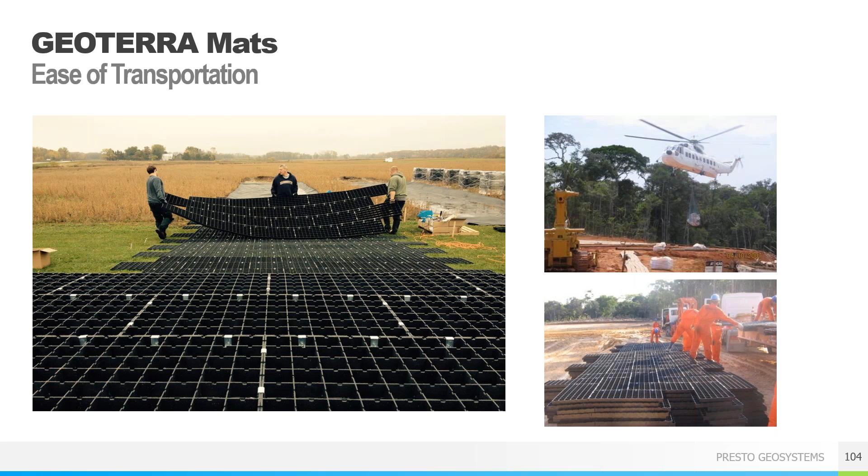And finally, a couple of project profiles using our construction mats. Here, GeoTerra construction mats were used to access many of the non-paved areas of this gas refinery site in Brazil.

Equipment storage was moved around as needed, so the temporary and reusable nature of the mats was key. They provided a place to keep equipment high and dry out of the wet clay subgrade, and made it much easier for workers to move around.

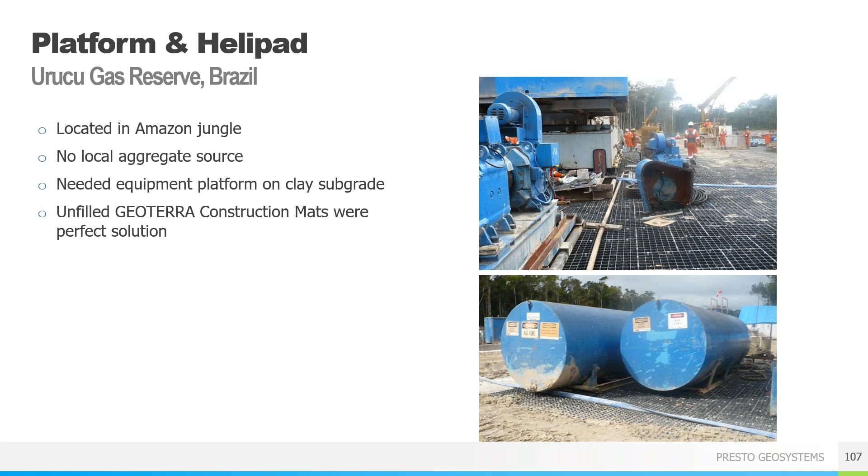They also used the GeoTerra to construct helipads to fly material and personnel in and out of the project site. Mats can be painted with signage as needed and then cleaned and reused at another location.

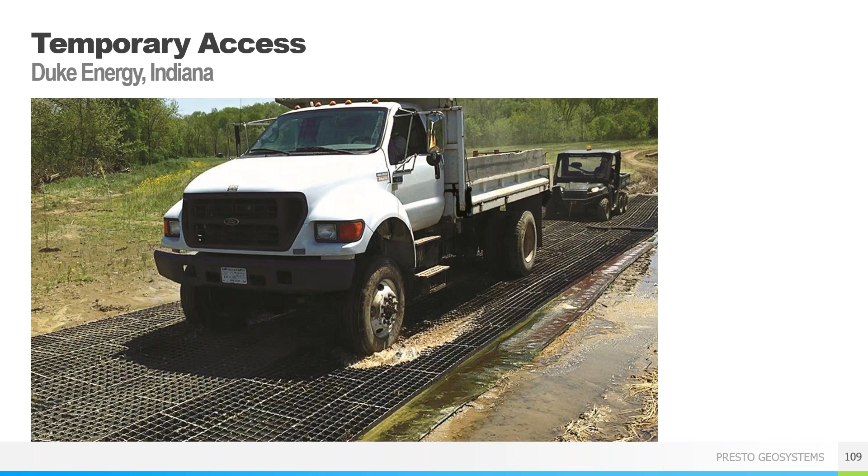The GeoTerra mats can also be used in wet environments. This project needed a solution for quick access over soft ground. The water moved through the mats as needed without compromising the integrity of the system for the vehicles.

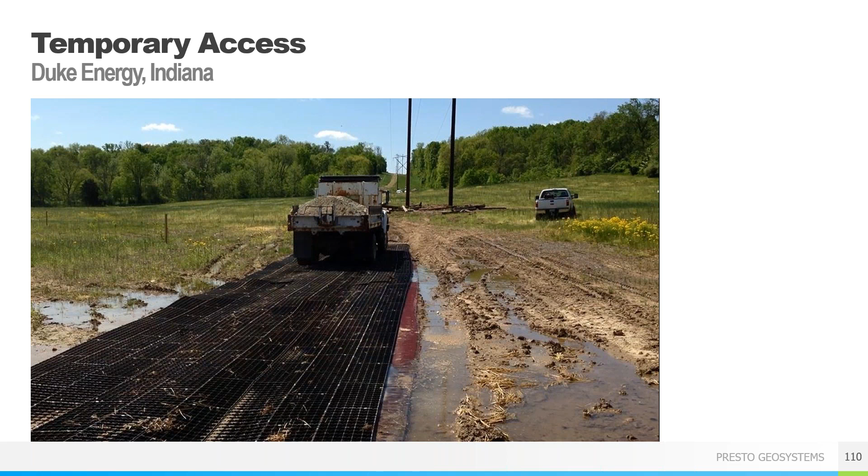They're typically placed over an enhanced geotextile, especially over soft ground like we see here, with the geotextile helping to provide a little bit of extra strength to the system and preventing the mats from sinking into the subgrade. And again, they're lightweight and easy to move.

So the best thing to do is to pre-assemble the mats into sections that can fit onto whatever vehicle you're using for quick and easy deployment.

As mentioned a few times, we provide a complete solution, and part of that is our technical assistance. The engineering team here at Presto works closely with engineers, offering free project evaluation for any roads, embankments, or erosion control project. The form is on our website, prestogeo.com.

You can fill it out with as much information as you have, including attaching documents such as geotech reports, and it will come to us. Then within 3 business days, but usually faster, we provide a complete design evaluation, including infill recommendations, anchorage requirements, and design calculations. We will work with you to get you the best solution for your project.

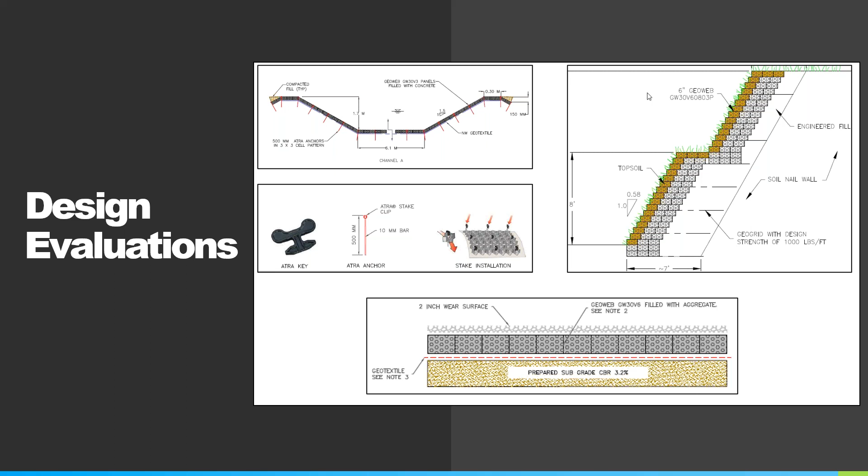We deliver quality and over 40 years of expertise, guaranteeing each shipment meets or exceeds our specs, so you can deliver certainty and build with materials you can trust.